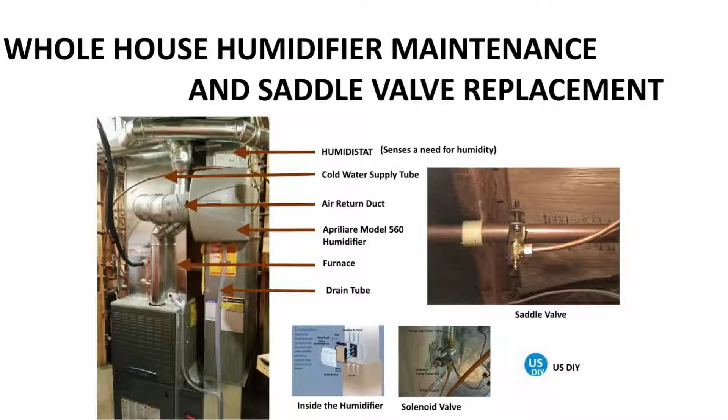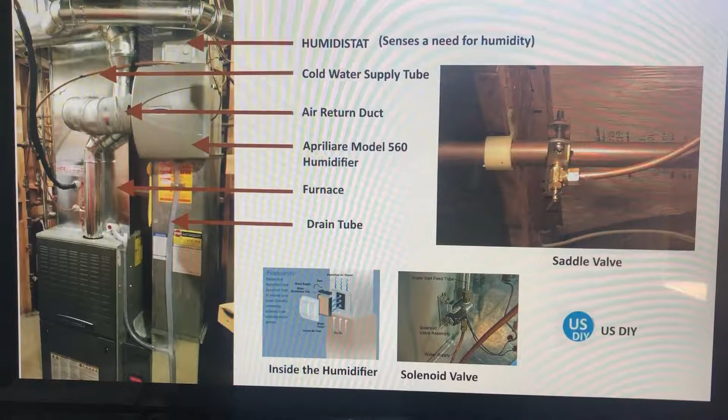Hello guys, this video is all about whole house humidifier. Particularly in this video we are going to install the saddle valve, and I'm going to cover the maintenance of whole house humidifier.

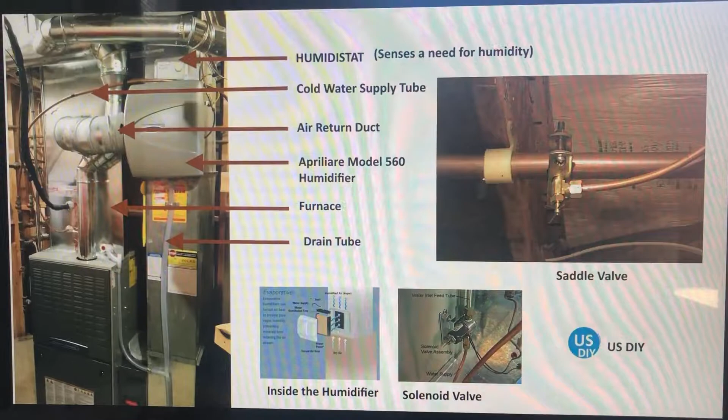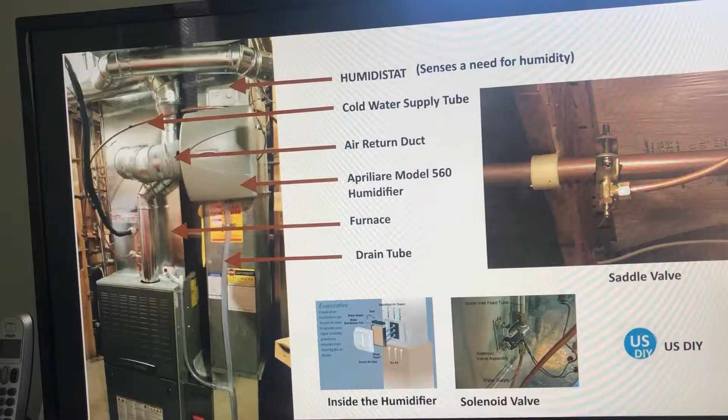Before going to the whole house humidifier, let's understand what exactly the house humidifier is. When your home feels uncomfortable, we always blame the temperature. But there is another factor at work that can make your home feel uncomfortable, even if the temperature is perfectly warm, and that is humidity level.

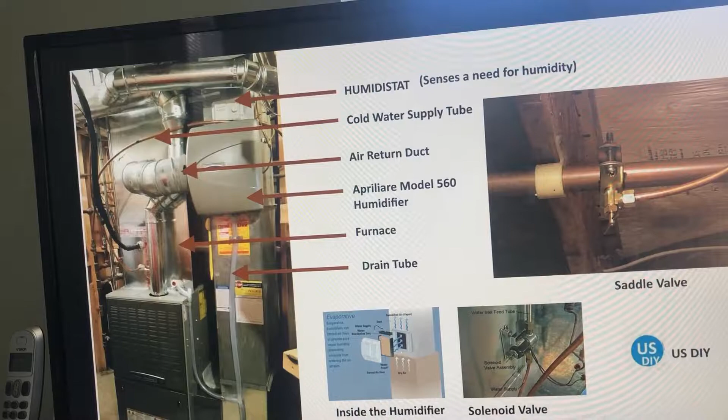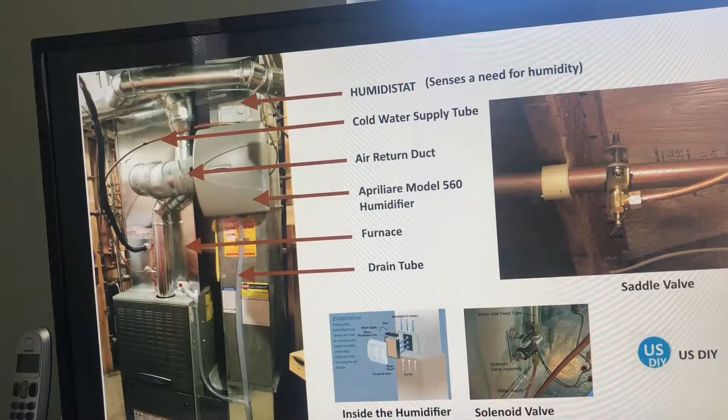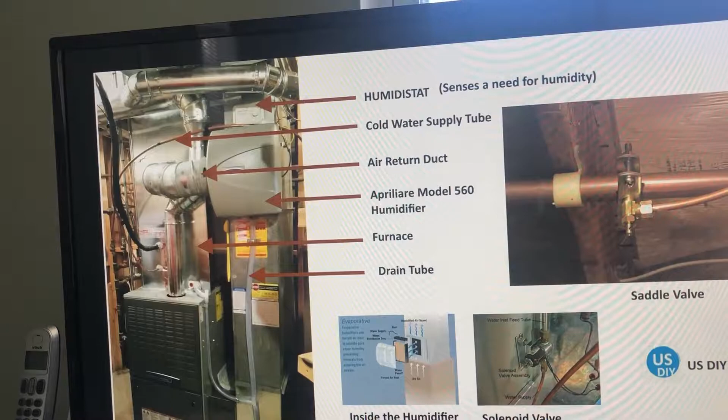Whole house humidifier is installed directly in your heating system duct, which I've shown you here. When your furnace is cycling and heating air in your house, that air is also humidified by the whole house humidifier. This means that every room in your home can enjoy humidified air by using a single unit, and this is installed on your ductwork.

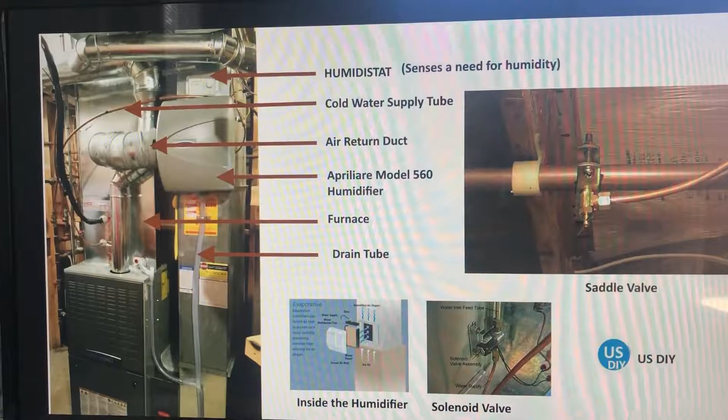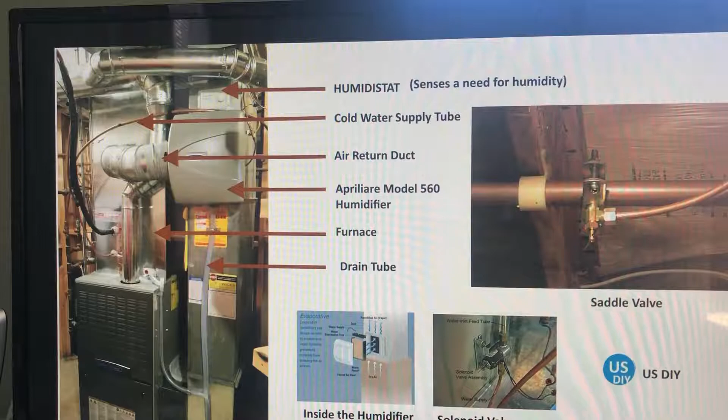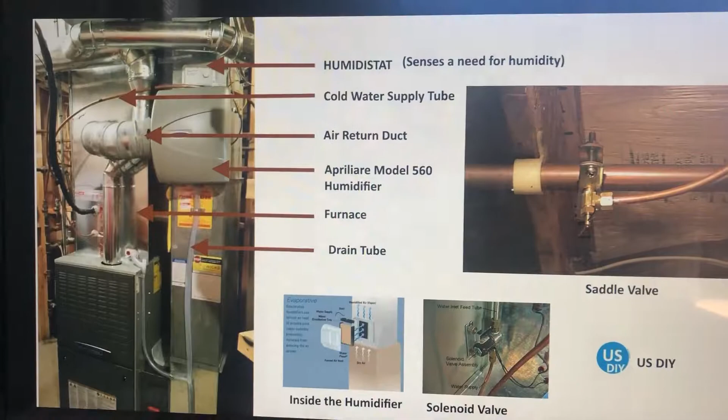There are a lot of benefits of installing this whole humidifier: it maintains a proper comfortable humidity level throughout the home. It helps alleviate dry skin in winter time. It protects wood floor and furnishings from drying and cracking. And definitely the energy saving is one of the major factors.

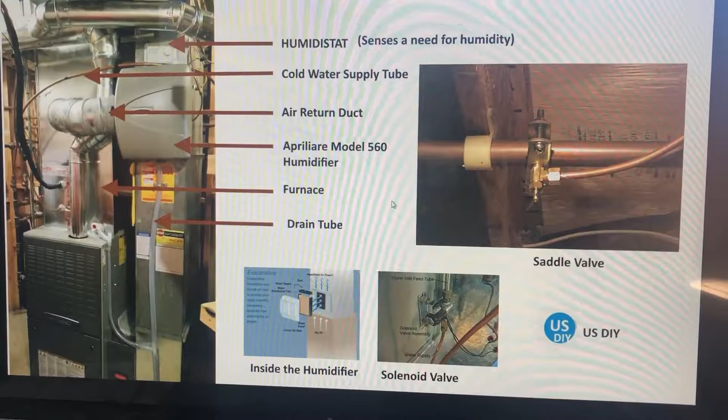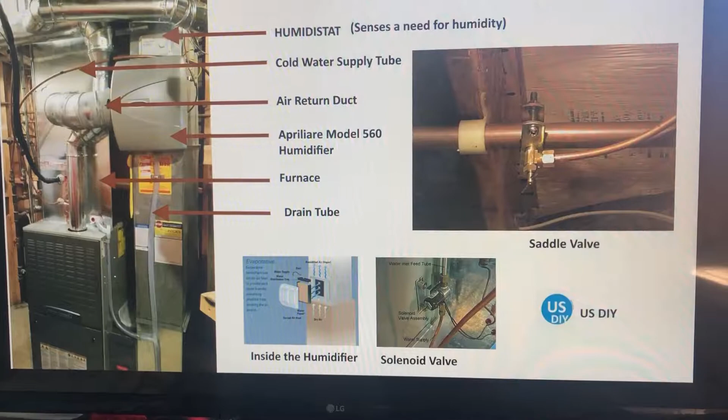Now, what are the different components of whole house humidifier? First one is the humidistat. This senses a need for humidity, and then the water flows from this supply pipe to the duct, and then it gets circulated to the house, and I will go over that in a bit.

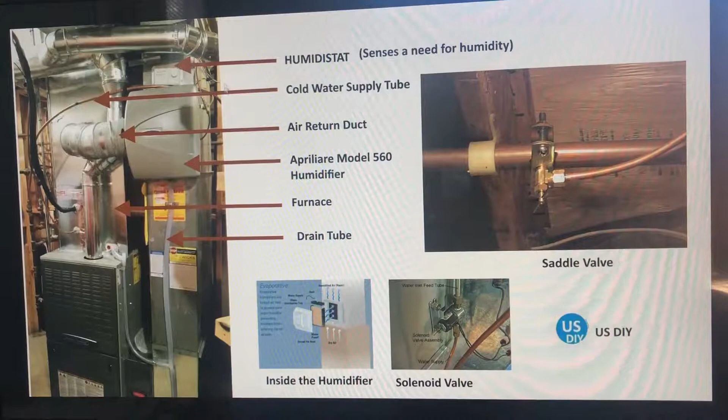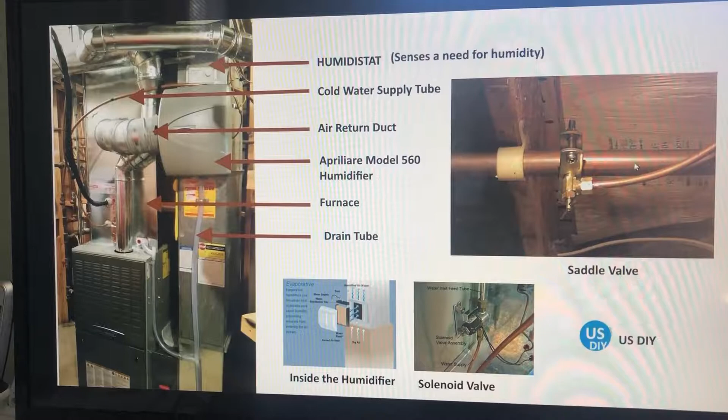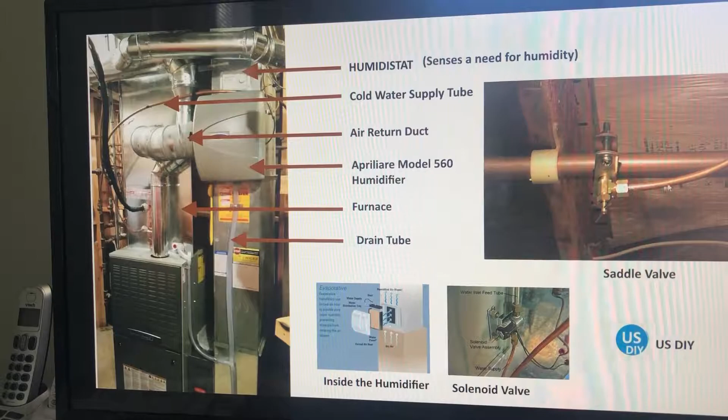So the first component is humidistat. Second one is the cold water supply tube, and this is the tube on which the saddle valve is installed. If you look over here, this is your main water supply line, and this is the saddle valve installed on that water supply line to take the water through this pipe and supply it to the humidifier.

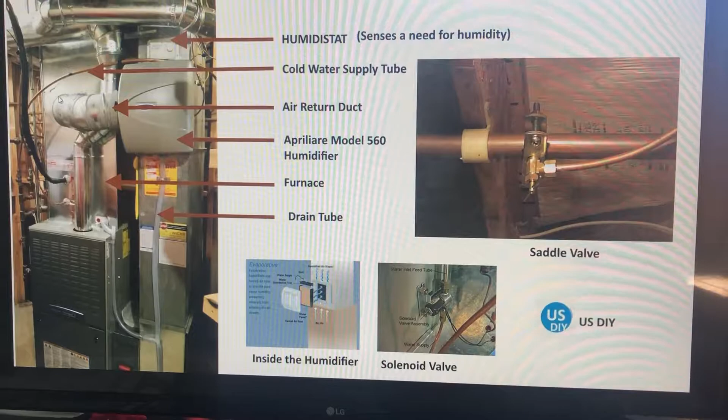Then the third part is air return duct. So this is bypassing the air, or supplying the air, to the whole house humidifier.

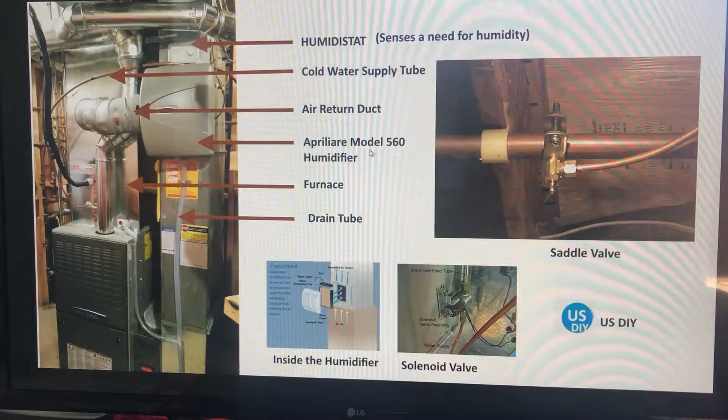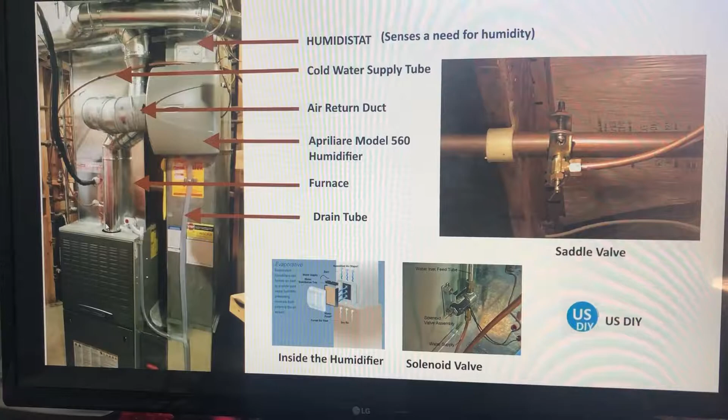Then this is the actual humidifier. In my case, it is model 560 humidifier of this company. Then this is a furnace, which is our standard stuff. If the whole house humidifier is not installed, then you will not see this setup - this humidifier won't be there, this duct won't be there, this cold water supply won't be there.

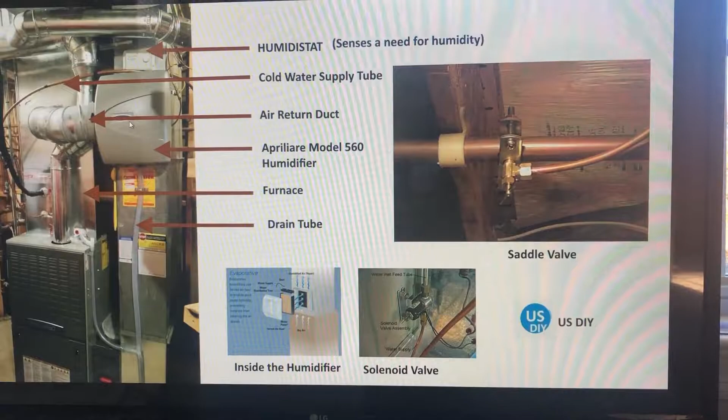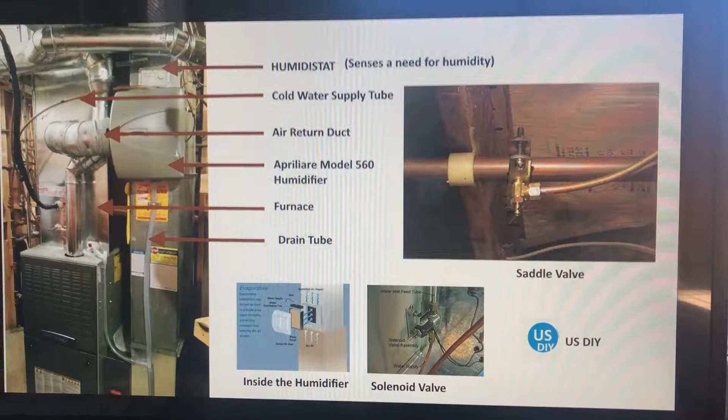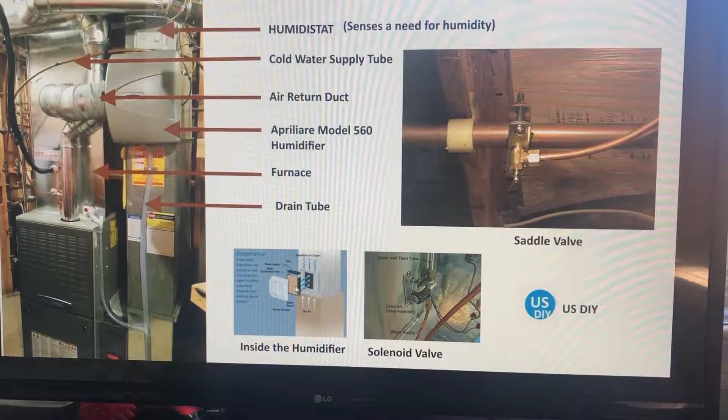Then drain tube - so any excessive water drained by the humidifier, that drains through this pipe. And this particular humidifier, in general for all humidifiers, you have to change the filter. So over here I have shown how that filter could be removed and how to install that filter.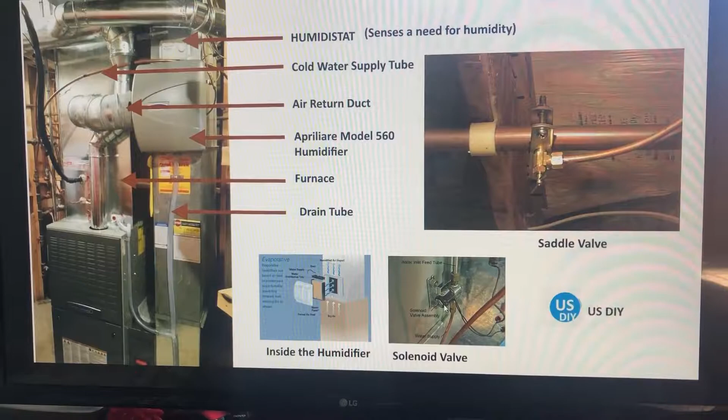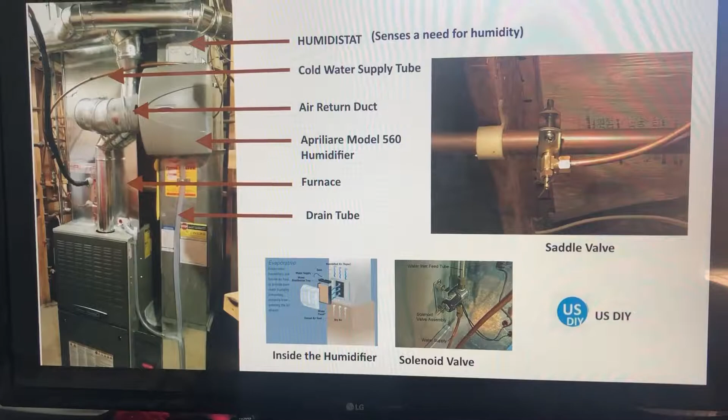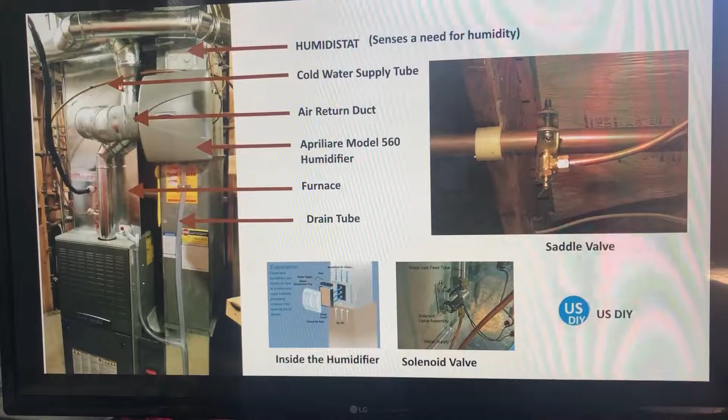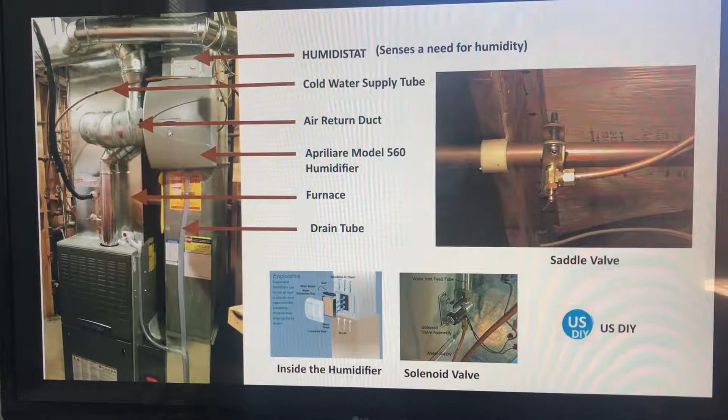And the water supply to the humidifier is controlled by the solenoid valve. So over here there is a solenoid valve. If the humidity level decreases in the house, the humidistat sends the signal, and this solenoid valve comes into action, and it allows the water to flow through this pipe to the humidifier. Then this air return duct pushes that water droplets to the main supply air duct, and this is how it works.

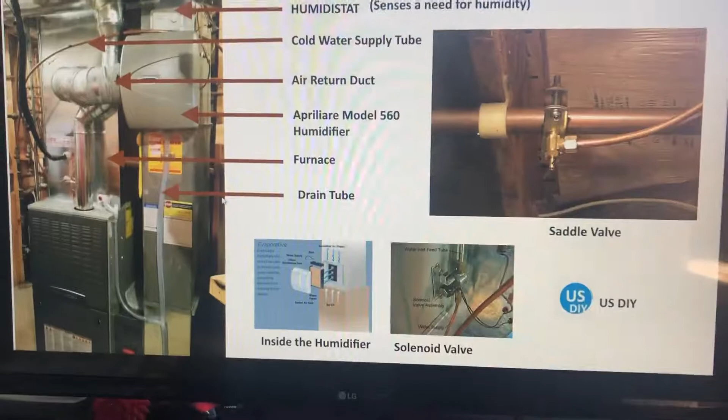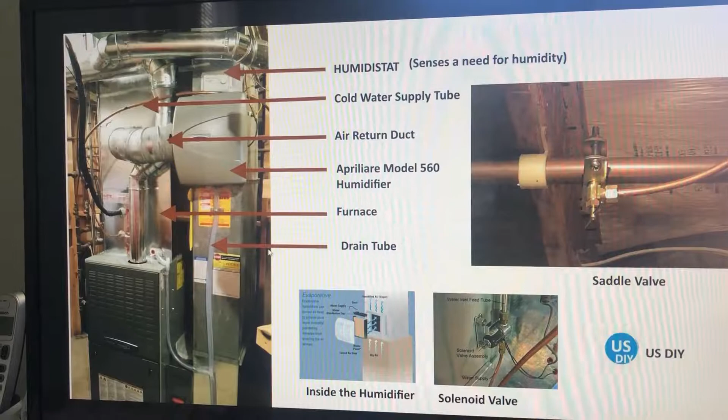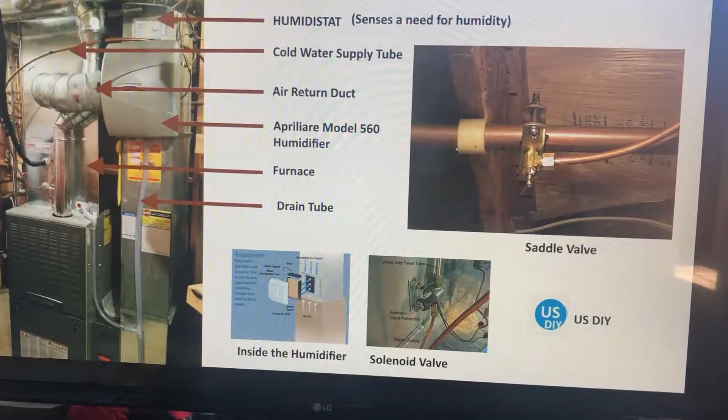So if you are interested in more, I'm going to upload another video which is only going to cover the maintenance of the whole house humidifier. But in this particular video I'm going to cover the replacement of the saddle valve and how this saddle valve plays an important role in this whole house humidifier.

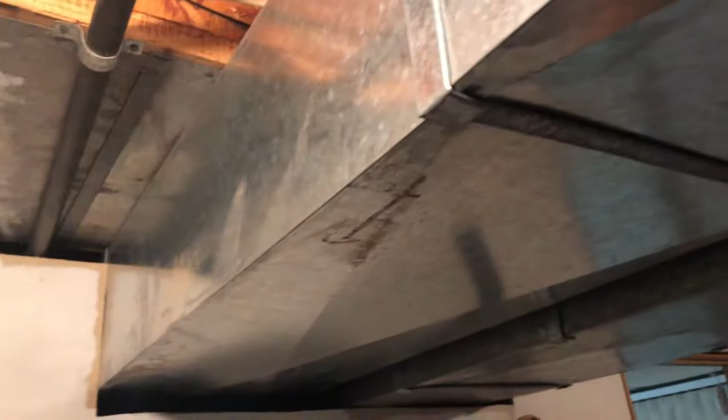So let's begin. Hello guys, I'm in the basement in the area where the water heater is installed, and if I show you, next to the water heater we have this furnace which circulates the hot air to the entire house through these ducts. And then on one surface of the furnace, we have this humidifier.

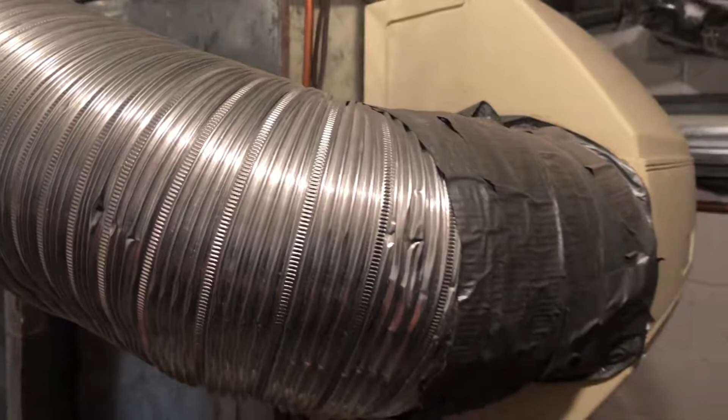This humidifier is a flow-through whole house humidifier which humidifies the house using a natural evaporation process. And the model which is installed over here is model 560. Today's video is all about maintenance of this whole house humidifier. I'm going to cover each component in detail and show you how exactly this humidifier works and what things are required for the maintenance.

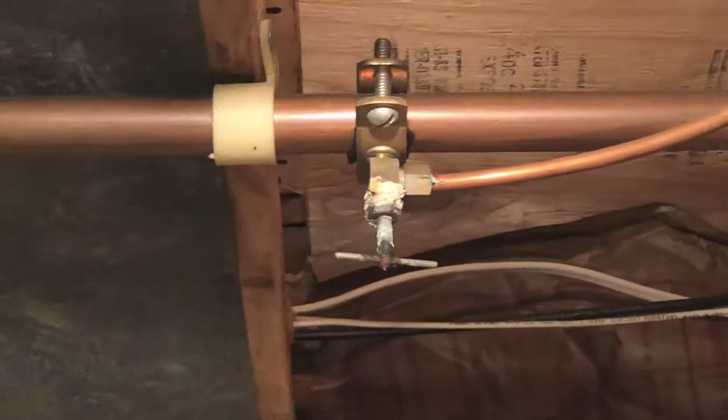One of the things we are going to cover also is changing the saddle valve, which is over here if I show you, and it is kind of corroded because of the hard water. So I'm going to replace this - or first I'm going to attempt to clean this one - but mostly I'm going to replace this with a new one.

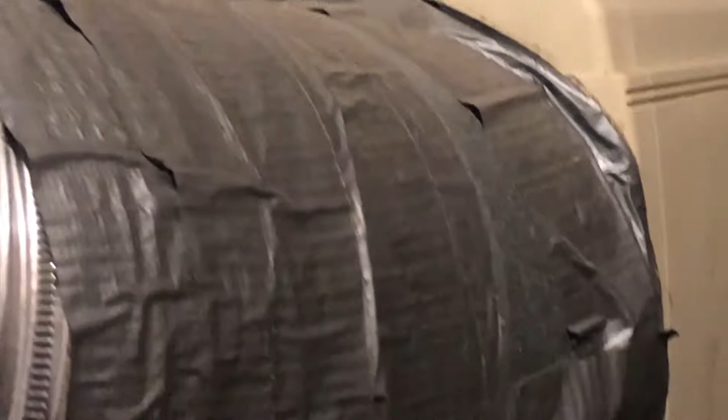So this video is all about whole house humidifier, which is over here. And let's first start with each component of this humidifier.

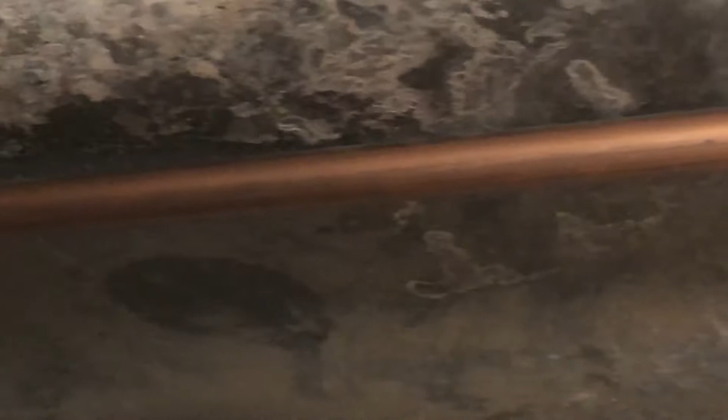First thing first, the humidifier needs water, and this is provided by tapping into the existing cold water supply line close to the humidifier. This particular device is known as the saddle valve. Usually the saddle valve is tapped into the cold water line, as I mentioned earlier.

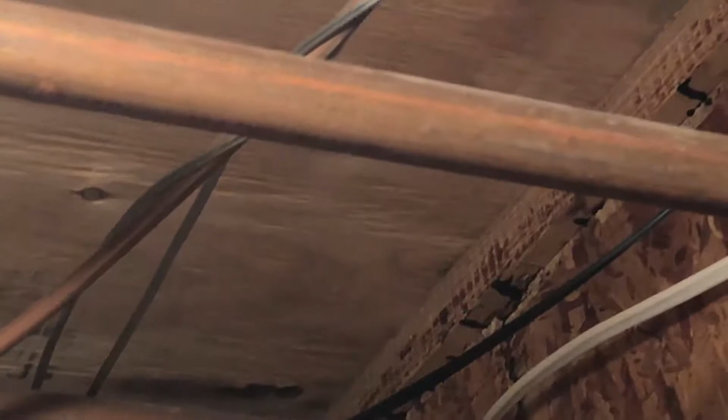Over here you see this is our cold water line and this is hot water line. Once this saddle valve is tapped into the cold water line, another small diameter pipe supplies the water to the humidifier. If I run through this one, you'll see that this entire small pipe is going all the way and reaching to the humidifier.

Supplying the water through this solenoid valve, which we'll cover shortly. In my case, this particular saddle valve has gone bad because it's not installed properly. Usually it should be installed sideways, but here it is installed in a downward direction, and because of this, hard water is seeping through that saddle valve and it has corroded. So if you see over here, it is not supplying water to the humidifier. So the plan is, first I will explain what components are involved in the humidifier, and then we'll replace this saddle valve.

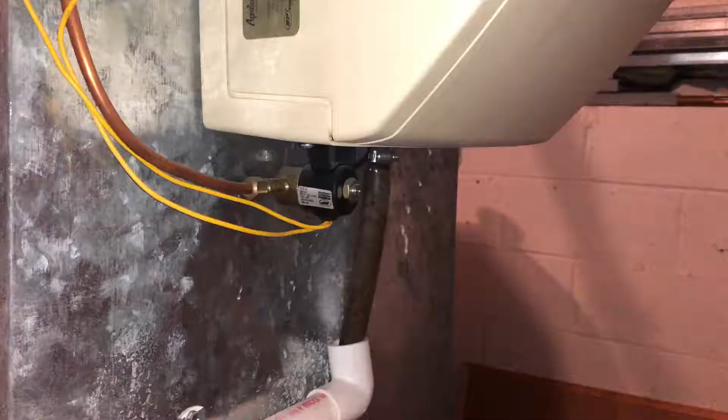Just underneath the humidifier there is a valve, and this valve assembly is called the solenoid. The purpose of installing this solenoid valve is that since water can't just run to the humidifier all the time, the water supply flow needs to be controlled, and this is done by the water inlet orifice and inlet valve assembly controlled by an electric solenoid. The solenoid is controlled by a humidistat.

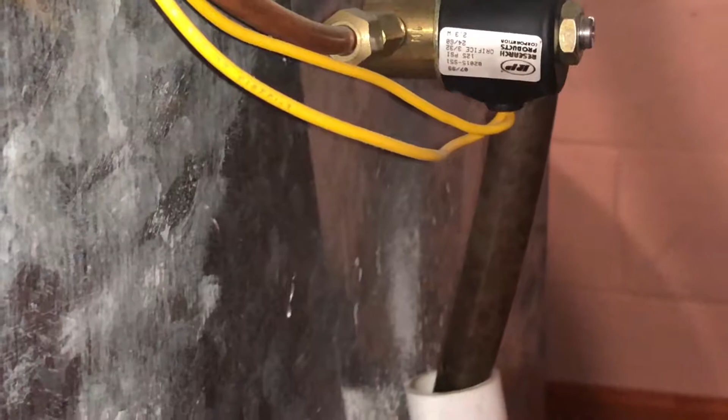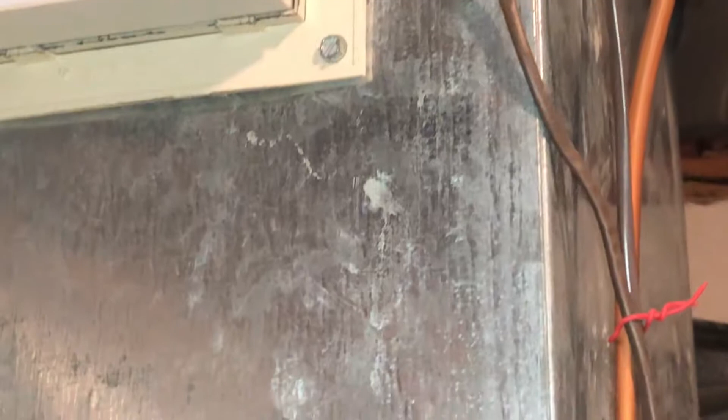What is a humidistat? Basically it's the controller which controls the humidification in the entire house. When the humidistat says to increase the humidity, this solenoid valve opens and supplies water to the humidifier. And when the humidity is achieved, whatever you have set on the humidistat, then this solenoid valve restricts the water flow towards the humidifier.

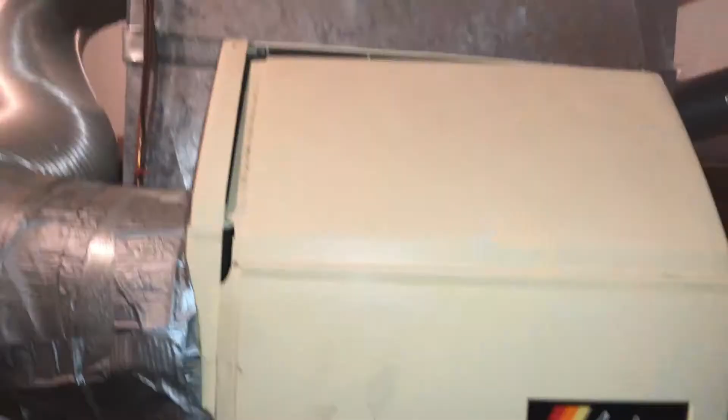So far we have seen three components: one is the saddle valve, the second one is the solenoid, and the third one is the humidistat. And here is the actual humidifier. I've just removed this cover.

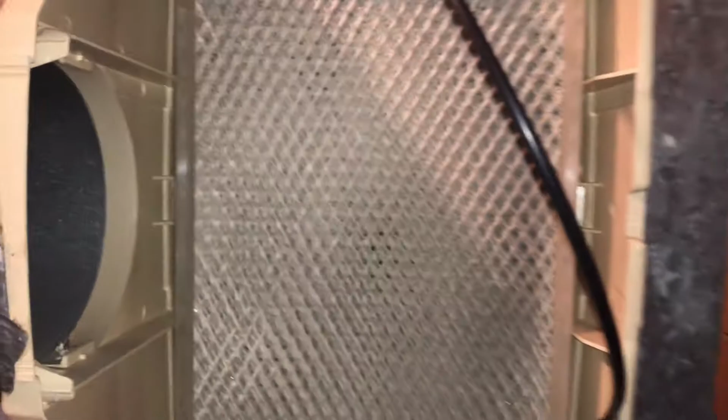Let me remove this cover, and as soon as you remove this cover, you will see the pad. This pad has different names. Sometimes some guys call it an evaporator panel, or some guys call it a water wick. So the way it works is basically the water supply coming from this pipe falls on this pad, and then it ripples through this water wick.

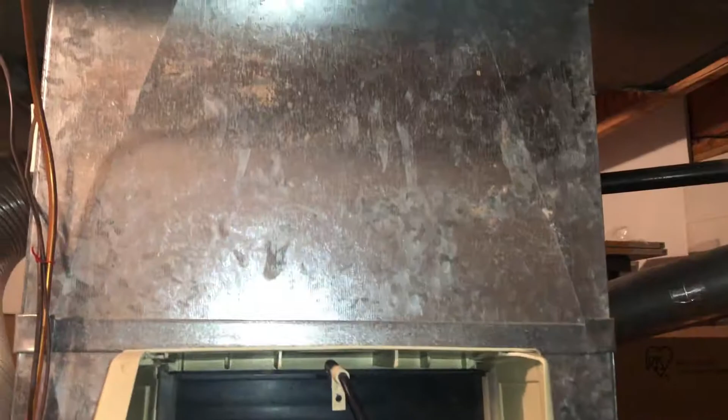The air which is coming out from this bypass area circulates through this one. There's no other way for this air to go, so basically the air from here flows through this water pad, and water evaporates, and it goes into these ducts. So whatever air supplies through the duct is now humid air, and it humidifies the entire house.

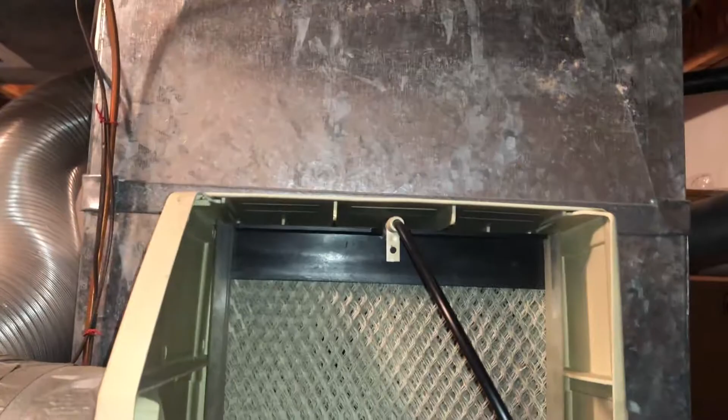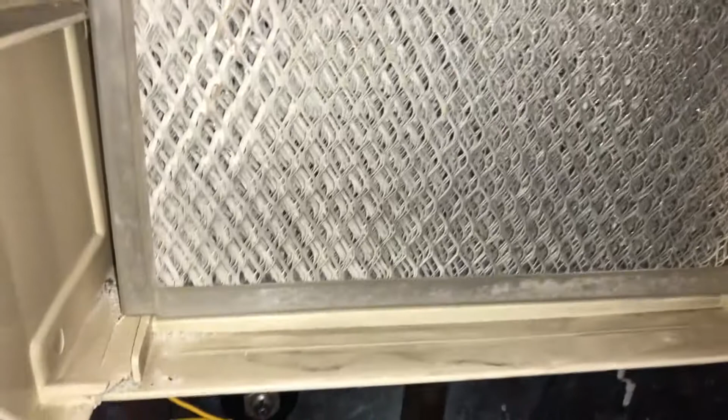So the setup is simple, and if there is more water accumulating in this pad, then it drains out through this drainage. Pretty straightforward setup. Often you have to change this, replace this entire sheet or panel once it goes bad.

In my case, the panel is good. The only thing which has gone bad is the saddle valve. So first I'm going to shut off the water supply, and then open the saddle valve, and then we'll replace the saddle valve. I'll explain how exactly the saddle valve can be installed on the existing pipe.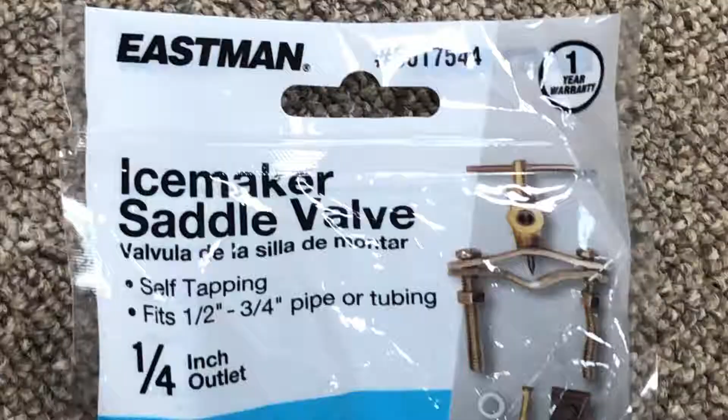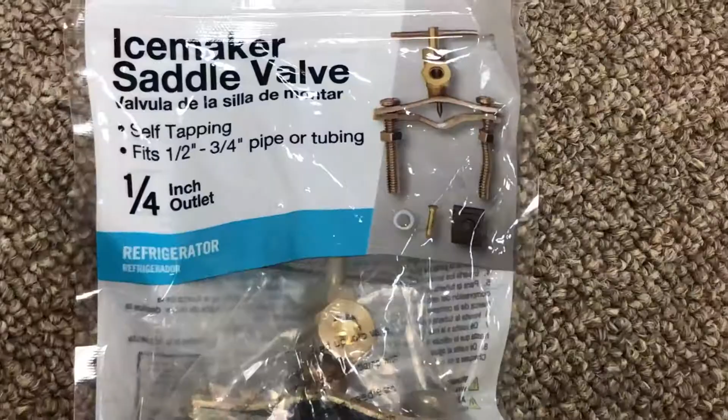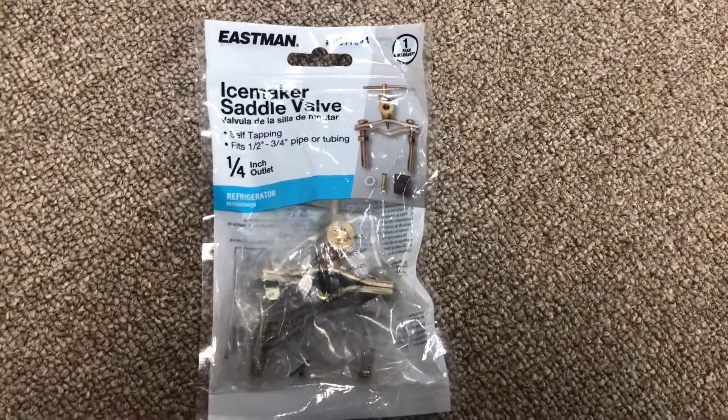This is the self-tapping saddle valve I'm going to use. This fits into a 1/2 inch or 3/4 inch pipe or tubing. Let me open this bag and show you what components are included. It has a washer, it has everything in it. You just have to remove your old saddle valve after shutting off the water, and install the new one. Pretty straightforward activity, but let me show you in detail.

This saddle valve comes with the copper sleeve, that is this one, and the plastic ring, that is this one. These two things are not required if your water outlet pipe is a copper pipe. In my case, the water outlet is a copper pipe, so I'm not going to use either of these things. The only thing I'm going to use is this copper slip compression nut and the brass ring.

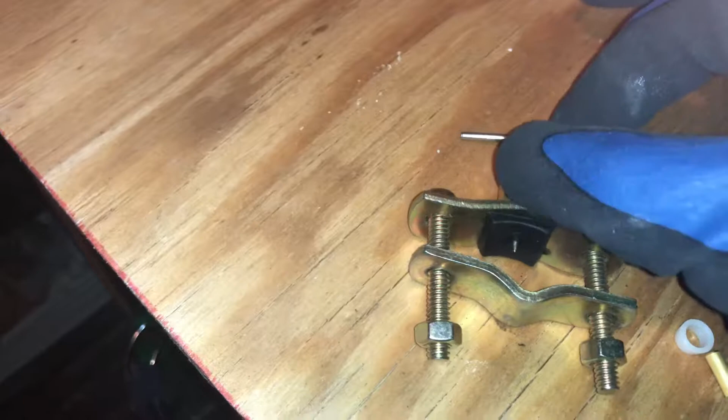The brass ring is inside this one. So if I open this one, there is a brass ring, that is this one. So this will go first, and then this one.

I'll show you this in detail, but this is required only if your outlet pipe is copper pipe. In case your outlet pipe is plastic, you have to pierce a hole into the plastic pipe, and then use this copper sleeve with the plastic tube.

So let me first open the existing saddle valve. I've already shut off the water supply, and I'm going to remove the current saddle valve and replace it. No piercing is required in my case because the current setup already has a hole in the copper pipe, onto the inlet pipe.

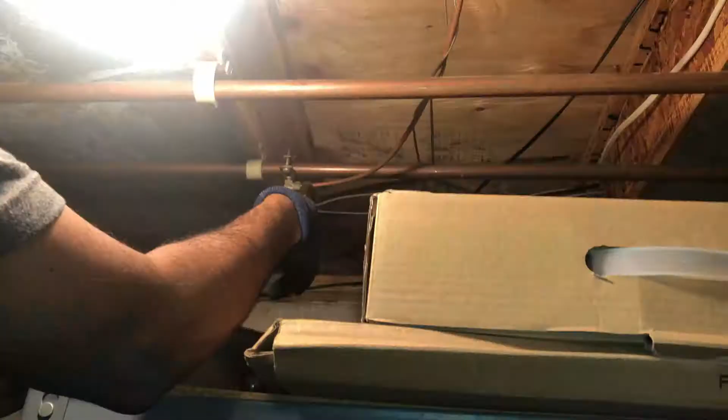So I'm removing this nut first. This is kind of corroded—the entire saddle valve is corroded. Let me remove this. It's tight, so I'm going to use a screwdriver to remove it. Let me take out this nut and the screwdriver, and then I'll show you how the existing saddle valve was installed.

This part is pretty straightforward—just remove these two screws, and once you remove this, you'll see there's already an original pierced hole there.

So I'm going to install my saddle valve exactly at this place, and the water will flow from that hole through this pipe to the humidifier.

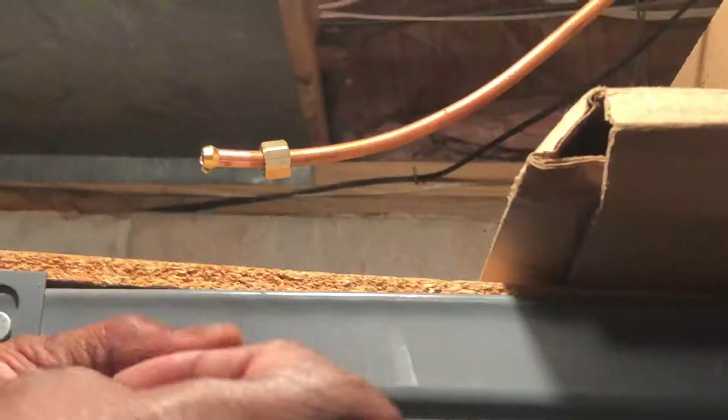Since this saddle valve isn't moving and is kind of gone, I'm going to cut from here so I can discard this entire old saddle valve, which has gone bad. So I'm removing this saddle valve fixture to make it available for installation.

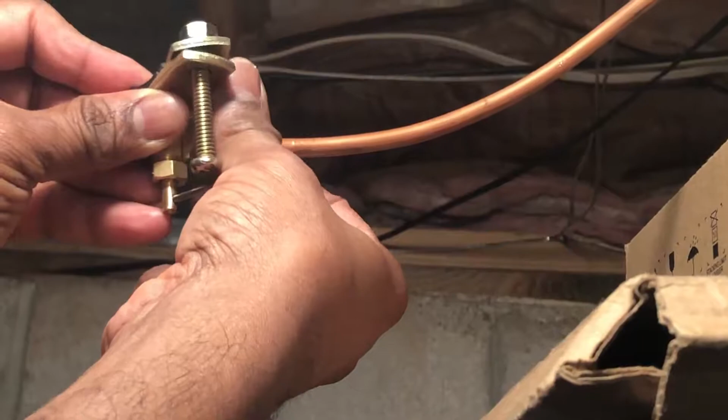Now this brass ring is on the pipe, and this nut is on this one—a washer nut—and this is going to get connected like this, and I have to tighten this to make sure it's an airtight and watertight contact.

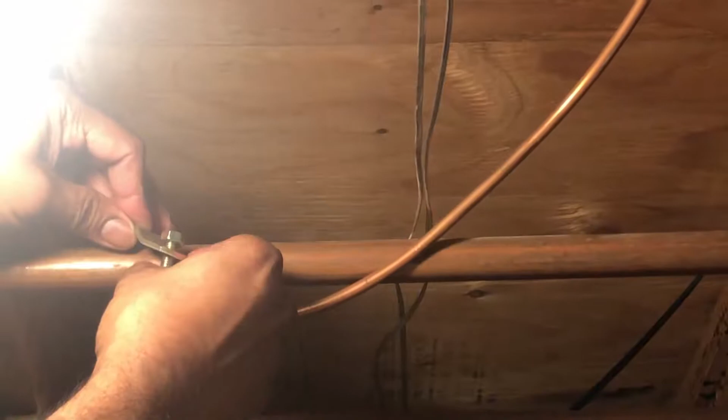So it's up to you, just tighten it, and now this will go over here. This pointer usually pierces into the copper water pipe where you're installing, but in our case we're installing it at the place where there was already a hole.

So I'm going to install this exactly—match this pointer with this hole—and it will go like this. Then we have to screw this in such a way that it fits over here.

Now when you are screwing these screws, make sure you don't do one side first and then the other, but do it simultaneously—a few threads for this one, then a few threads for this one, and so on. I'll show you that in a bit.

Let me adjust this entire saddle valve over the existing hole, and then I'll show you how to tighten it. I place the saddle valve and match the saddle valve pin with the original pipe hole, and now I'm just screwing this in.

The point I was referring to earlier is not to tighten one screw fully first and then go for the other, but go simultaneously—a few threads for this one, say 1, 2, 3, then the other, 1, 2, 3, 1, 2, 3. This way equal pressure is placed on the saddle valve.

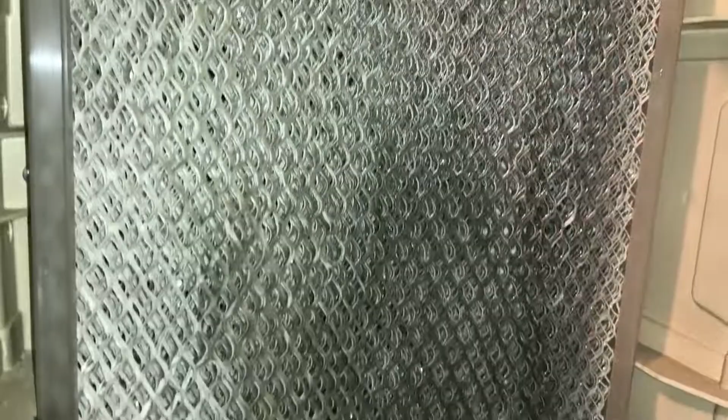As you see, the water is coming and it's going to moisten this entire chute, and the air coming through this duct is going to pass through and increase the humidity. So we have fixed and completed the maintenance of the whole-house humidifier.